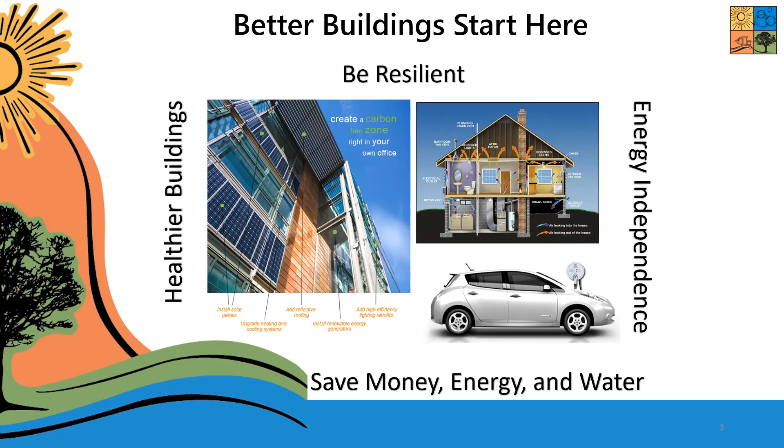Just a little bit about our division. Not many people realize that the county has an energy and sustainability division, or if they do, they don't realize the number of services that we offer for the community. The division was originally created in 2006 to address internal county energy use in order to mitigate climate change through greenhouse gas reduction. And in 2009, our first community-facing program was introduced. The Sonoma County Energy Independence Program, also known as SCEIP, was and is the first and longest running residential PACE program, which stands for Property Assessed Clean Energy.

The program allowed property owners to finance energy and water savings improvements as a tool in reducing greenhouse gases, which has since been expanded to include wildfire safety and seismic strengthening improvements. We'll go into that in a little bit more detail later. Since that time, we have added a number of resources and services. Our primary focus is buildings and behaviors. We assist customers through a variety of services. We work with cities, towns, special districts, businesses, and residents to increase energy efficiency in their buildings through audits, energy retrofit projects, rebates, and financing.

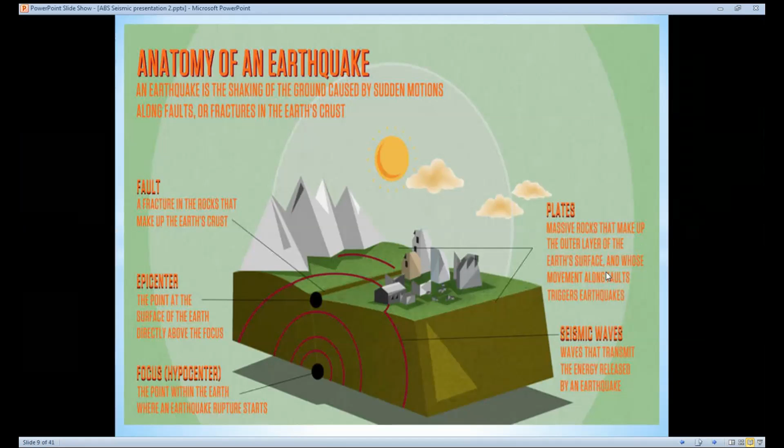The epicenter is where on the surface is directly over the focus where the big movement of the plate started. And then a fault is where the plates sit together. And next picture might help. This was a little screenshot I took back in September when I did a presentation similar to this. This is one day where they identified the biggest earthquakes. You can see this is the 25th, 24th, 23rd.

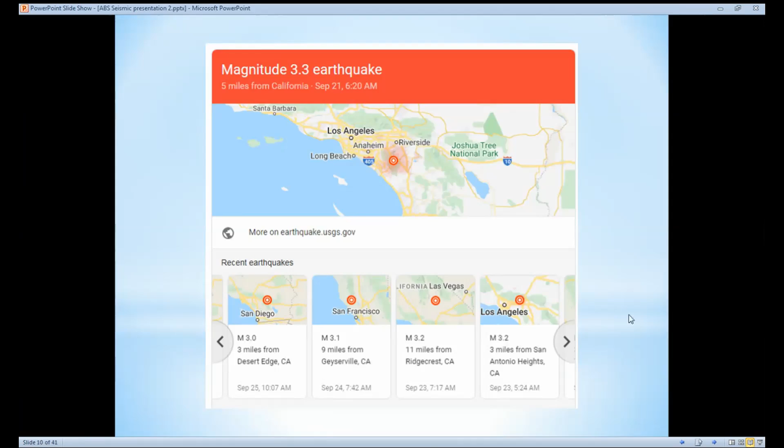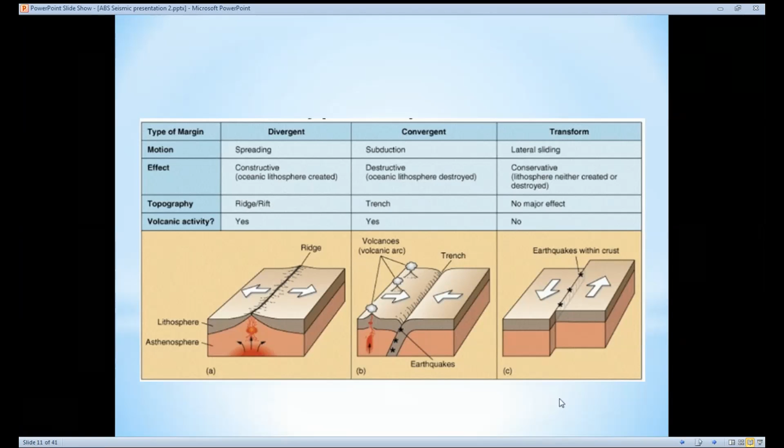Let's talk about plates first. So these are the big plates throughout the world. You can see the Pacific plate, which is a pretty good sized chunk of the Earth, is grinding up against the North American plate. And they're moving at the rate of about 2 inches a year against each other. So the question is, when does that pressure of that movement that the plates want to make, when do they slip and release that energy?

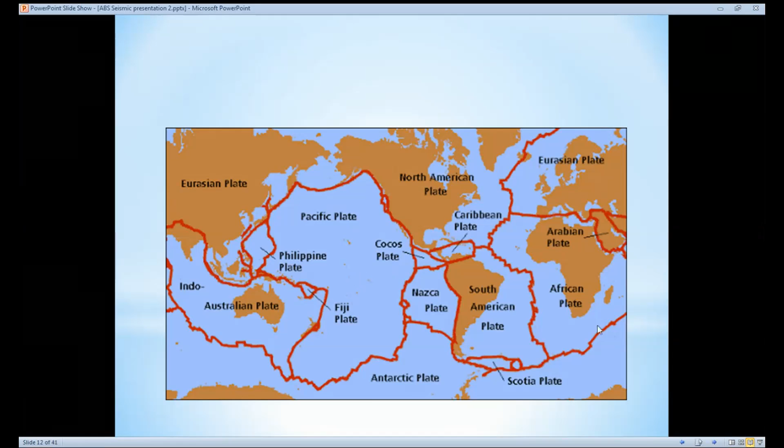So we hope someday we can actually predict earthquakes. We're not there yet, but this is where we live and this is our concern. But you can see Japan is notorious for being an earthquake country, like California, and Fukushima can show how serious the tsunamis that result from earthquakes are. And actually anyone who lives fairly close to the ocean should be aware that earthquakes along these edges can generate some pretty big waves that can cause a lot of damage. So if you live close to the ocean, like in Bodega Bay, remember where the high ground is. Anyway, primary plates on the Earth.

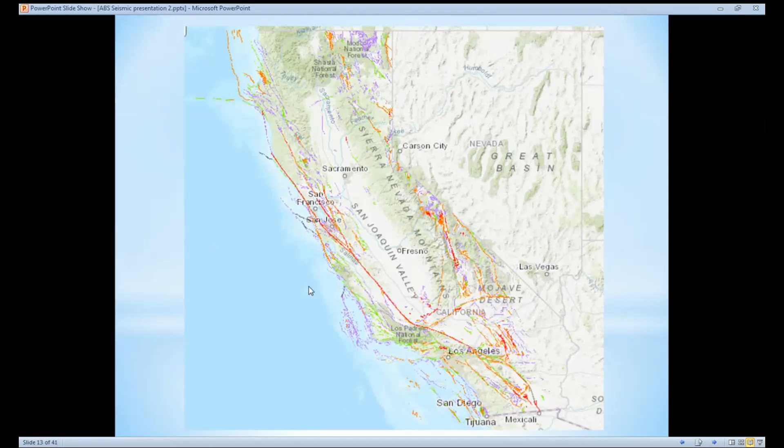So these are the big plates they pretty well understand, the biggest ones with the most potential. The orange ones are ones that seismologists have a fairly good understanding of. And then the purple ones are the ones that, generally speaking, they think pose less threat, but there has definitely been movement in all these little faults in purple. So this big long one here is the, let's see, Rodgers Creek Fault, which they thought were separate, but then they found out they actually connect all the way down to Hayward.

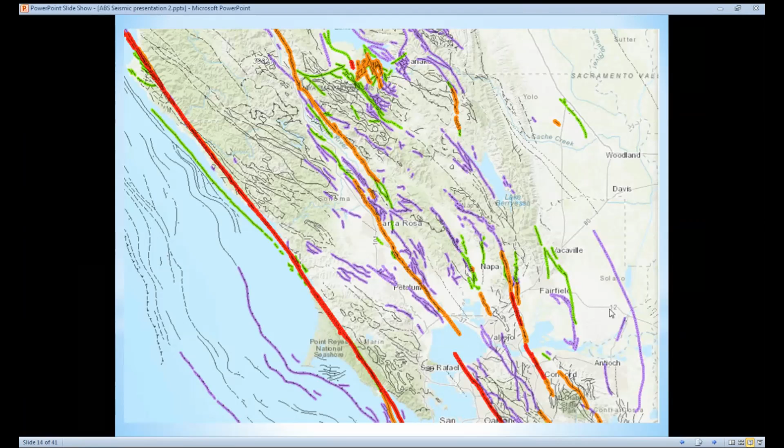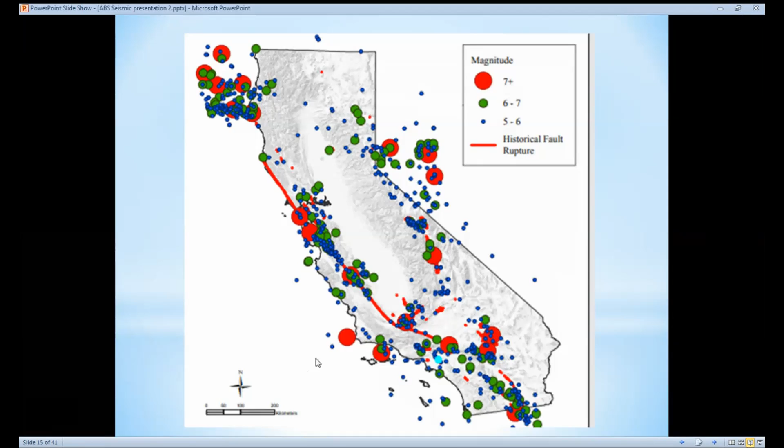This is a history of how many earthquakes we've had since about 1780, I believe. Red ones are big ones, 7+. A lot of green ones, 6 to 7. The red line here is the San Andreas Fault, they pretty well understand that movement. It pretty well runs through our pretty crowded coastal areas, but 7+ is serious. I believe the worst earthquake on record in North America happened in Alaska, I believe in 68 or 69, and don't hold me to this, but my recollection was it was like an 8.6, and that shook down almost everything. That was very intense. Anyway, those plates are moving, and when they slip, it really shakes the ground.

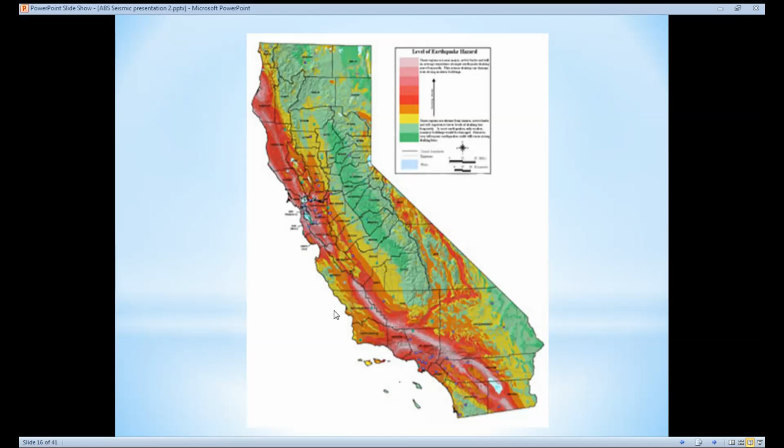So here's a little chart of the level of hazard that state seismologists believe various areas in California are prone to. So you can see our little home up here in Santa Rosa has a fair amount of little white running through it, which is a pretty high level hazard area. That's one reason the state has been providing some rebates for people to go in and retroactively strengthen the attachment of the house to their foundation. And also one reason why Sonoma County is happy to finance seismic retrofits, because we are, simply stated, in a high hazard area.

Another closer look. So there's our nice little Santa Rosa. A lot of purple and red. If you're living up in the hills, those mountains tend to be more stable than down here in the valleys. They say that the Santa Rosa Plain is alluvial soil that's been washed down for millions of years from the mountains and settled. And they say when an earthquake hits, that alluvial soil acts like jello. It can vibrate quite a while, but with different motions in its vibration.

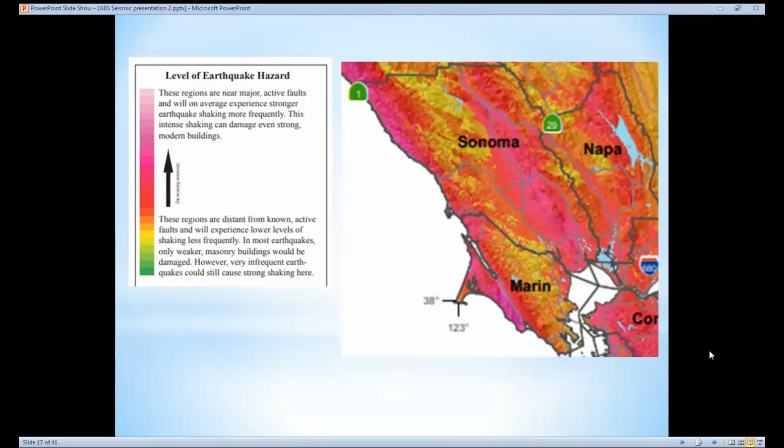So another little look at faults, Rodgers Creek, and then here's the bay. Not the easiest map to read, and they're pretty sure these two are actually the same fault. And then the Maacama fault, and then of course the San Andreas fault. And you can see where it runs right down the middle of Tomales Bay.

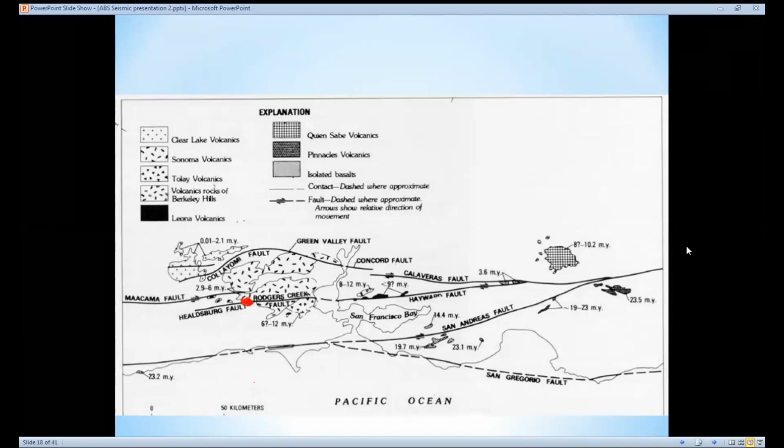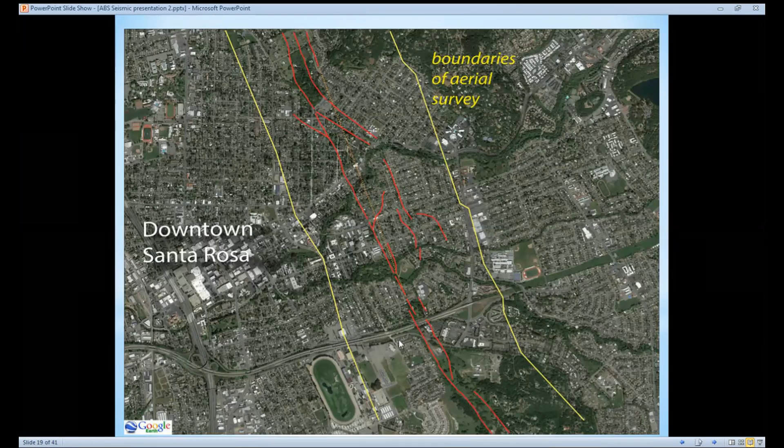And another little picture for you. This is an area the state and county mapped out pretty well to identify faults. Quite a few of them. This is the intersection of 101 and Highway 12. And here's pretty much downtown. So one reason they shut down the old Memorial Hospital on Chanate is it was virtually right underneath a fault. And just one more picture showing faults. That's my home. A little curious.

One point I would make about that, though, is don't think if you're 10 miles away from a fault that your house isn't going to get shaken. The Loma Prieta earthquake centered very close to Santa Cruz, in the hills to the east of Santa Cruz. And we felt it pretty darn good here in Santa Rosa. I can tell you exactly what I was doing when that earthquake hit, and it's something you'll never forget. I had to reach out and grab a door jamb because I was afraid I was going to get knocked to the ground. And it's frightening. It kind of brings the seriousness of it. And that was not an extreme earthquake by any stretch of the imagination.

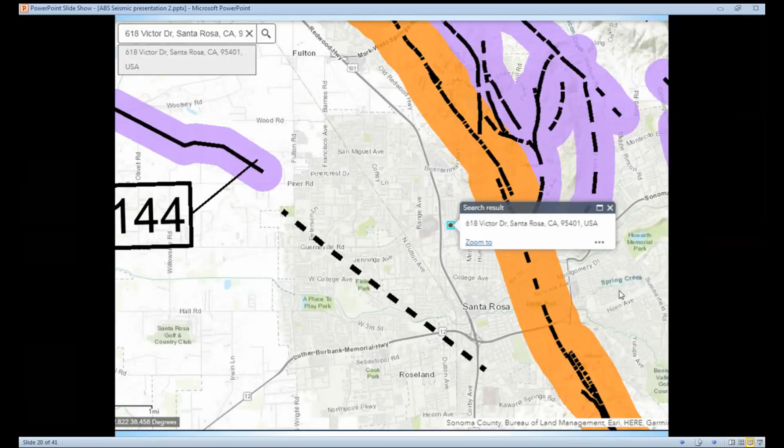So those energy waves that are released when those plates shift against each other travel hundreds of miles. And this is a little thing just to show you that the guys that study this have identified 4 primary ways that energy waves travel through the surface of the earth. And somebody who named these had a great sense of humor, because one type of wave right here is called the love wave. So there's got to be an interesting story how it got that name.

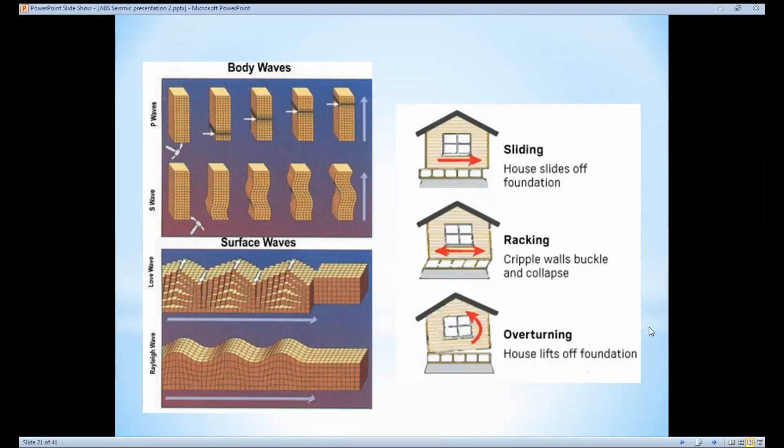So this is 3 examples of how houses can get knocked off their foundation. And once they're off their foundation, they're almost always damaged to the point where they have to be demolished. So it's really important to make sure your house is securely attached to your foundation. So the big one's coming. What can we do about it?

So another thing, make sure your water heater is strapped. A lot of fires and a lot of damage. They say that about half the damage in San Francisco was actually the result of fire. And then the fire department at that time had the idea they could stop fires by dynamiting ahead of the fire. Turned out that really wasn't a great theory, and that did a fair amount of damage to San Francisco too.

But anyway, yeah, if this water heater tips over and this flexible line is torn, you're putting a lot of potentially dangerous fuel in your home. Not good. So make sure your water heater's strapped. Anytime we do any kind of work on a house that requires a permit, we always have to show that the water heater's strapped and that there's smoke and CO detectors installed in the house.

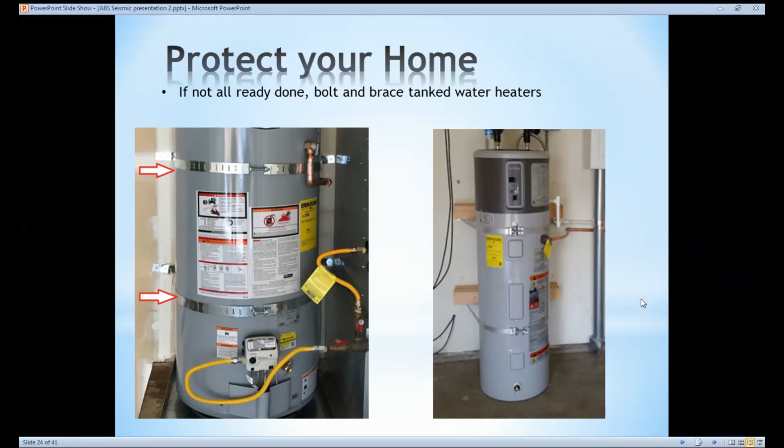Of course, the other solution is to go all electric, which is becoming encouraged more and more as our electrical supply gets cleaner and cleaner. In my own home, for example, I have no more gas appliances, not just for safety, but for greenhouse gas reduction. So you're going to see less and less gas as we go forward into the years. Eventually, gas, as you know, in Santa Rosa, Petaluma, Windsor, there's no new gas connections going into any new buildings.

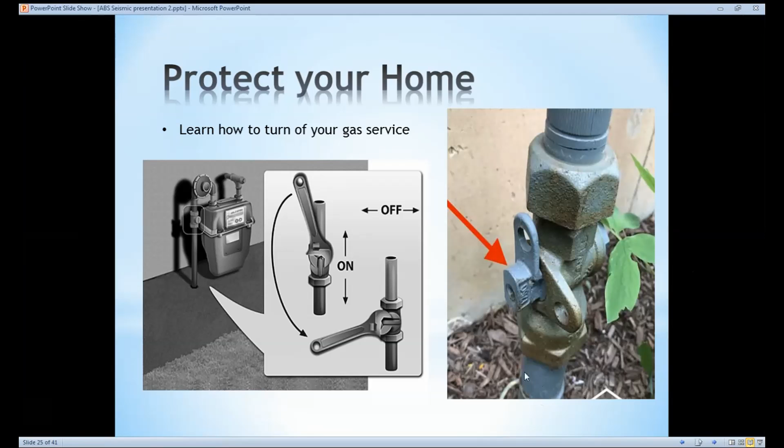Split level houses are notoriously weak against earthquakes, because with the single story butting up to the 2 stories, it's difficult to make a good secure attachment. It's not difficult, you just have to know what you're doing to make sure structurally the 1 story is securely tied into the 2 story. And so just some more examples.

If you have a masonry fireplace, those guys can be real hazards. If you want to keep that fireplace, you should have metal bands and poles that go back and anchor it into secure spots in the roof. So you might not want to sleep right next to your masonry fireplace chimney.

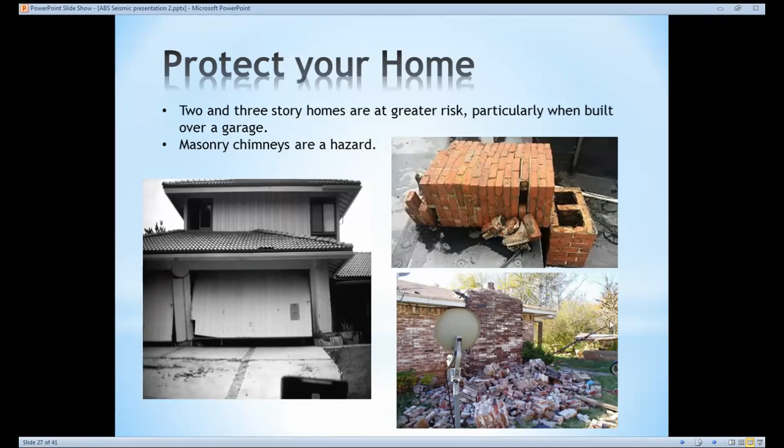Up until '79, we had little 1/2-inch bolts with little dinky washers that were real easy to... as the house is moving, not enough meat there to really make this a secure connection. A lot of houses just jumped right off the foundation when the motion was up and down.

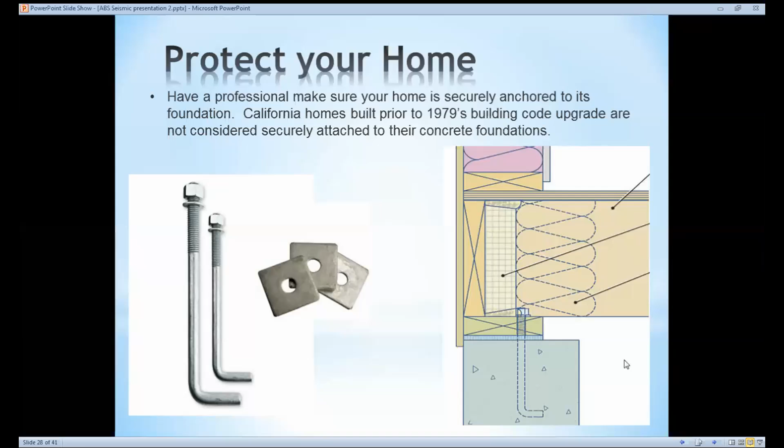So, you know, yeah, if your home was built before '79, consider doing some reinforcement to make sure the wood framing stays on the concrete. Or you have houses that can look like this and kind of ruin your day.

If your house qualifies in its construction, you can submit this to the building department and get your permit. It's a little bit complicated. You're going to need someone who has a basic understanding of construction to do your retrofit based on these plans, but you don't need to pay a structural engineer. The engineering's all been done as long as your home falls within certain qualifications.

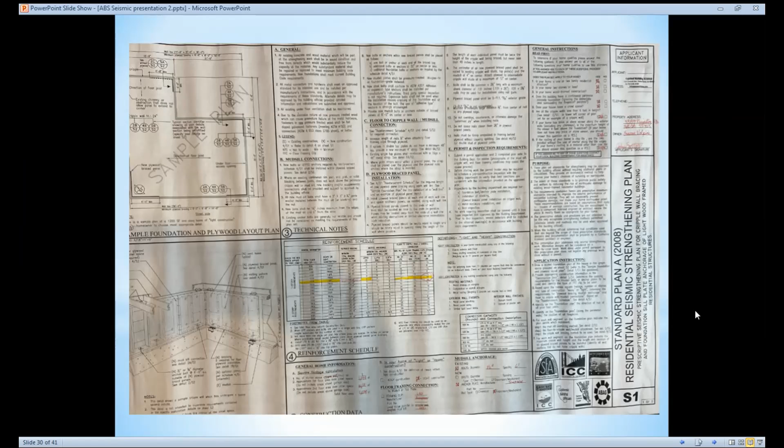And that's done by using the standard plan A, which you can download online, probably from the California Earthquake Authority. We've done multiple dozens of homes strictly using standard plan A. There's the second page of those plans.

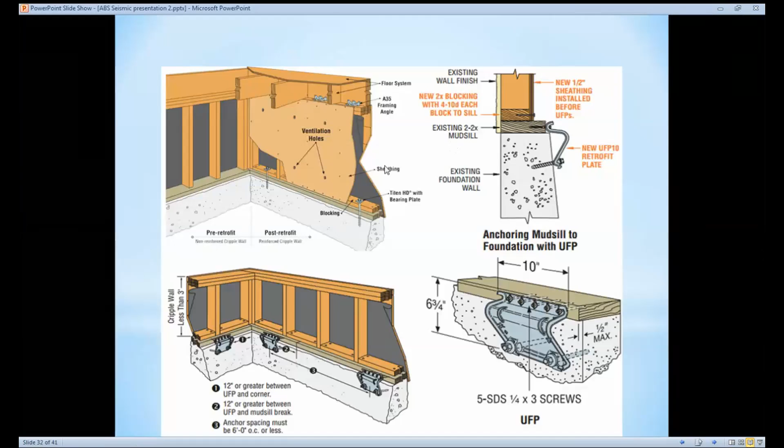Then these pictures are a little more understandable, what's really involved. So this is a reinforcement plate that, if we go in and do a structural attachment program, we can use 40 or 50 of these plates as we go all the way around the foundation. And then if you're on a cripple wall to raise the house up, there's reinforcement procedures we can use with plywood, and that's all got to be rated. But this gives you an idea of what a standard plan retrofit looks like.

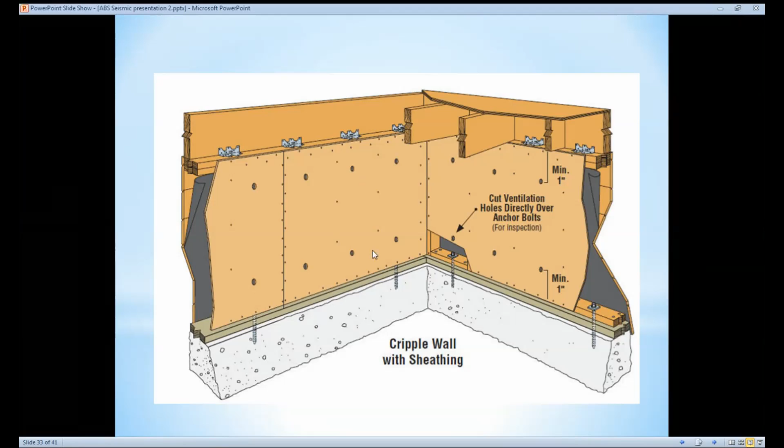And this shows how you can reinforce a cripple wall. Cripple walls are really a weakness, particularly when they have vertical siding, which was pretty common before World War II. Pretty easy to knock a house like that over, kind of in a domino fashion, on these cripple wall studs that support the floor above.

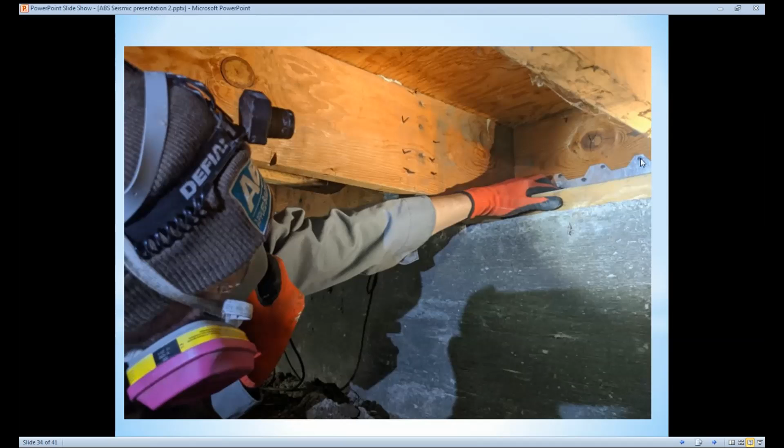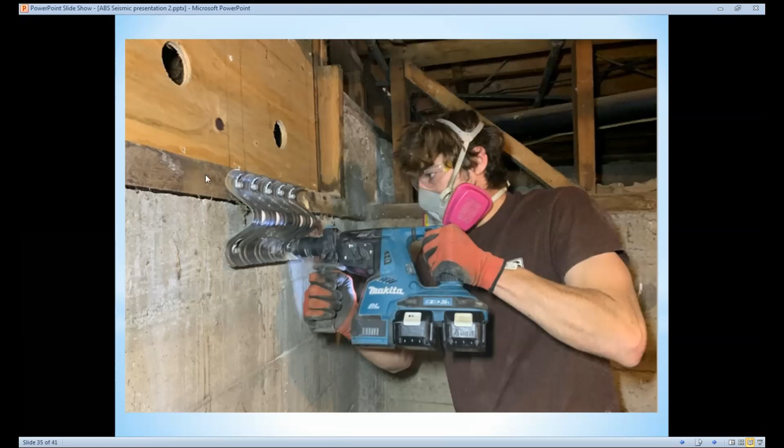So here we are doing some retrofitting. This is an L angle that we nail into the mud sill and we nail into the blocking of the rim joist to keep that connection tight. We'll put somewhere around 40 to 60 or 70 of these in a house when we're reinforcing its attachment to its foundation. Here we are drilling for these reinforcement plates that make sure the mud sill stays attached to the concrete of the foundation.

Another, sometimes it's pretty tight work. I admire our crew for being able to do this all day. It's not easy work, but the people that live in this house can sleep a little better when we're done.

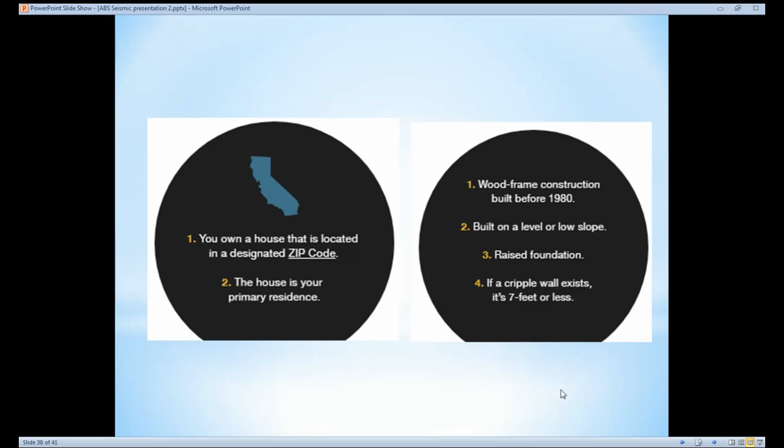So I love this. What does a structural engineer do? Yeah, basically they learn their stuff from experience. They do a lot of math, do a lot of math guessing, but it's going out usually after a pretty good sized earthquake. Dozens of structural engineers will descend on the earthquake zone to see how things fell down and to try to figure out what kind of motion caused that kind of failure.

And a typical structural engineer design can cost you, just in rough numbers, between $2,000 and maybe $5,000, depending on the size of your home and how complex it is. But they're the guys that live, eat, and breathe making sure buildings don't fall down in an earthquake.